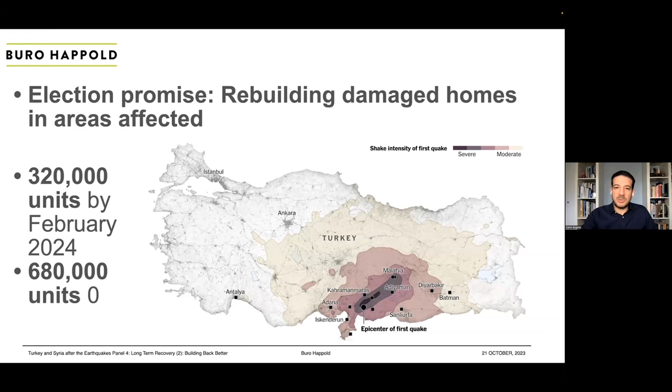So where are we now? Well, we have obviously the damage, and the government on the back of that during the election campaign back in May announced that it will build 320,000 units by the end of one year, so by February 2024, and also will build 680,000 by February 2025. And these are incredible numbers to be built in one year.

The former Minister for Environment, Urbanization, and Climate Change, Murat Kurum, went on CNN Türk back in May and said we already have 132,000 units under construction. However, as of last August, an estimate by Reuters showed only 40,000 were nearly completed, and it doesn't look like we're going to get the full construction anyways.

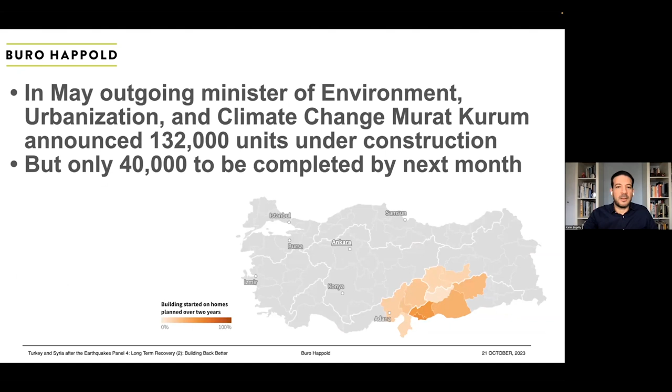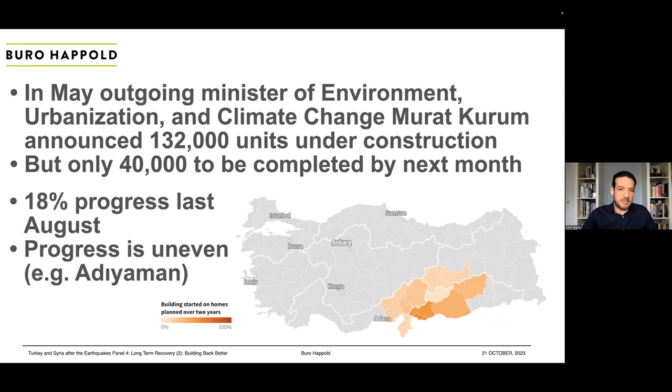On average, we have about 18% progress since February to date, and the progress tends to be quite uneven. Places like Adıyaman have much lower progress in terms of reconstruction. It really varies. I'm not going to go into why this is the case, but it's something perhaps you can find out for yourselves.

The way the reconstruction is structured is that all the reconstruction is handled by TOKİ, which is the Housing Development Administration, a national agency. And TOKİ normally manages about a quarter of this amount of construction every year, so for them this is a major undertaking.

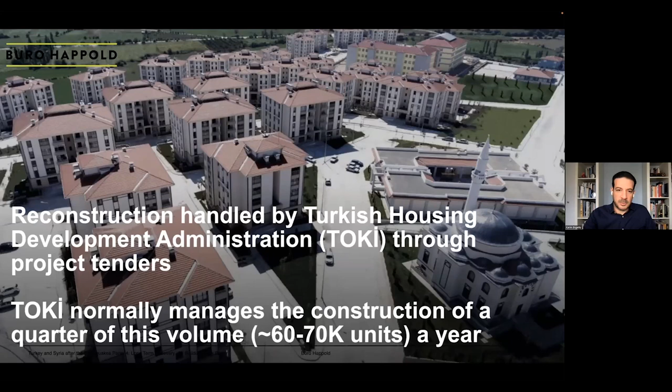What they do is they send out tenders, and private contractors will take on those units of construction, and perhaps some of the public realm that goes with that to build those. And of course, all of that is covered by the ministry itself, the Ministry of Environment, Urbanization, and Climate Change, which takes on an overseeing role.

What we have seen so far is an absolute laser focus on speed, which is very understandable given the fact that many people do find themselves living in container homes. But this pride in how fast we're going to build this so rapidly is a little bit surprising given the nature of the undertaking.

The way regeneration works tends to be quite complicated. It's becoming increasingly complicated given the environmental and social factors that have gone into the redevelopment process globally around the world, and everything tends to take more time every year or every decade rather than less time. And also, given the scale of this, the government's own estimates is that this is going to cost 105 billion, definitely more than 100 billion, which is roughly 10% of national GDP.

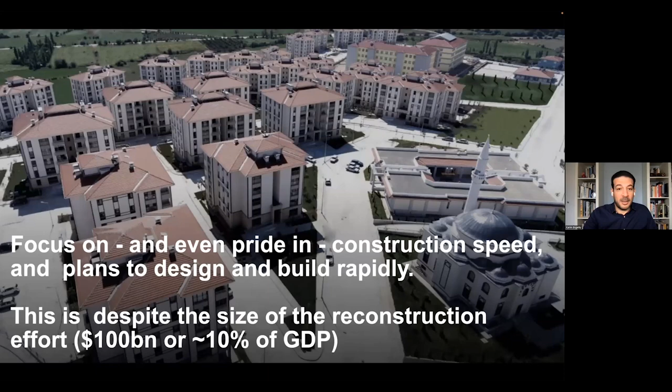This is no small undertaking, and doing it quickly has inherent risks. So only focusing on earthquake reconstruction, on the fact that we will only build this so it doesn't fall down again with the next earthquake, has, in my view, risks that I want to highlight during this presentation.

One risk is that you build something that becomes less livable—too hot because you didn't consider future climate due to climate change, for example, or it floods. We've seen flooding following the earthquake for unrelated reasons. If this area is constructed without adequately considering stormwater management, it becomes unlivable. If it becomes too polluted because you didn't consider public transportation or walkability, and depended too much on cars, that's also a risk. This unlivability means you end up with assets that you've spent significant money on becoming stranded assets. That's a risk that needs to be highlighted.

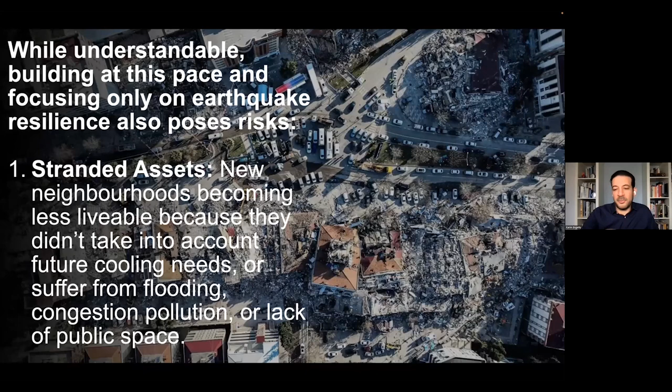The other thing is the missed opportunity, not only a risk but also the missed opportunity. There's a clear benefit in urban sustainability, urban resilience, and integrating those into large-scale reconstruction. You don't want to miss out on that opportunity. If you're going to spend $100 billion on reconstruction, you should do that in the best way possible to ensure its long-term sustainability, resilience, and its provision of livability and inclusivity for those who live there.

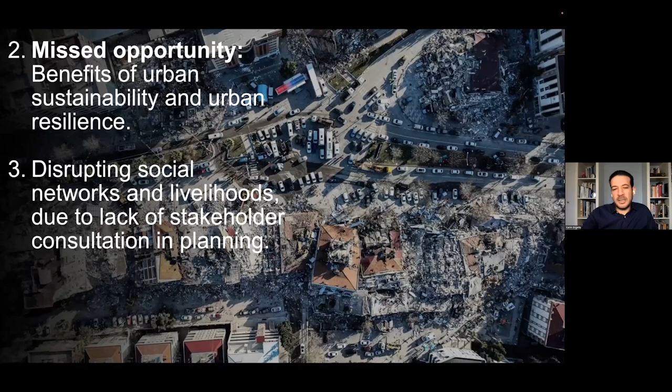In addition, the additional risk is that if you do this too quickly, you don't consult with the local population. You don't talk to people—where are their jobs, where do they live, how can we do this without disrupting their lives? Of course their lives have been disrupted, but they can be put back together with some degree of normalcy. If you build without this stakeholder consultation, you could end up disrupting some of those social networks, and also the livelihoods of people and the way they work.

It will definitely get less rainfall, potentially up to 40% less, which will affect agriculture. But the nature of that rainfall is that it will be longer droughts—it won't rain for longer, and then when it does rain, it will rain intensely. So longer droughts, but also more intense flooding. Overall, the amount of water will be less than it used to be, perhaps significantly less, and it will come in a less useful way. Because of the coastal nature of some areas within the earthquake-affected region, it could also experience sea level rise in some locations, which can have an impact. But I won't go into great detail since most of those cities aren't coastal anyway.

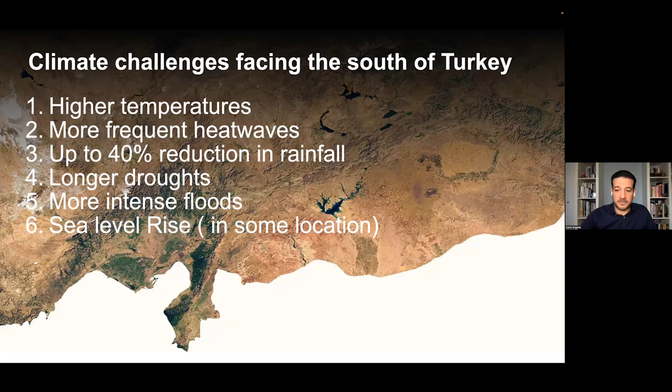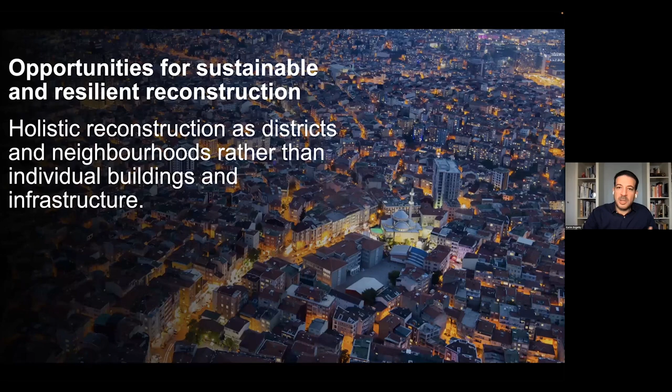So what are the opportunities that reconstruction should consider—opportunities that the models we've seen from Turkey don't necessarily aspire towards? The opportunities, in my view, are primarily treating this redevelopment process in a holistic way. These aren't units—we're not building a number of units, we're building neighborhoods, we're building districts. Those districts come with interlinked and interconnected urban systems that are best designed together, to explore synergies and opportunities of making the most of those urban systems, and of sustainability and resilience. This holistic approach, rather than an individual asset approach, is one of the most critical opportunities that needs to be exploited.

The damage being mostly in the historic cores, although not exclusively—the historic cores of those cities also, because these are the city centers, also has impacts on the whole city.

If you redevelop the city center, it regenerates the whole city, or it doesn't regenerate the whole city. It could hollow out the whole city. So it really is critical in how it can amplify the effect.

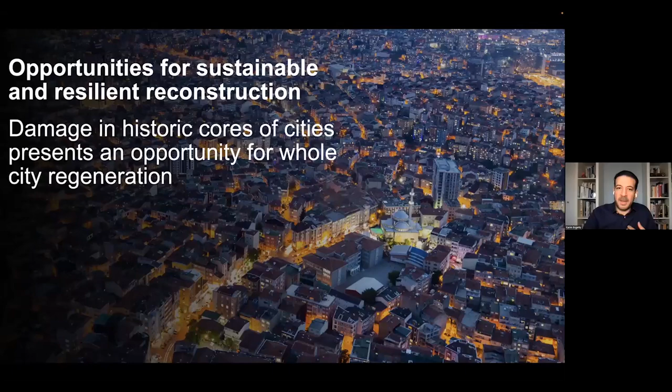If you develop a city center, it raises questions as to what kind of city you want around it. Do you create a more centralized city? Do you create a city where the city center is smaller, weaker, and becomes more polycentric, or more like an urban village, as you see in some places around the world? Do you do a city center that's strong and dense, but also with other secondary hubs? Every one of those models has its advantages and its weaknesses.

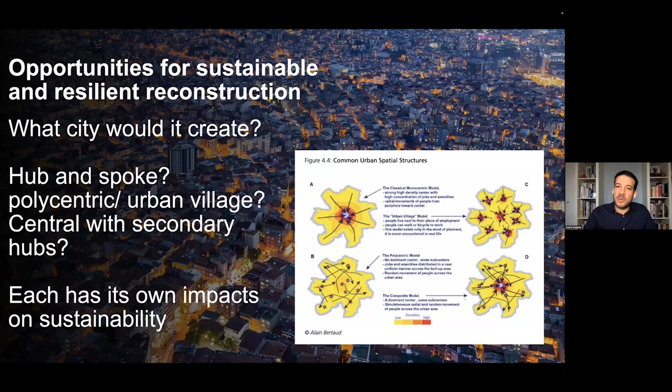As you approach a city center, you have to ask yourself what that means for the wider city. But regardless, we have these fundamental principles.

As you regenerate a city center after an earthquake, you have to ensure your land use is efficient. You have to densify—this goes without saying, it has to be dense enough. And this density has to be of mixed use nature. So mixed use planning gives you commercial, retail, offices, residential, plenty of it within the center district.

As you do that, the density and mixed uses within the city center will lend themselves to transit-oriented development, development driven around transportation, meaning you don't need cars as much. Many of those five provinces affected are highly dependent on cars, and there isn't really major infrastructure for public transportation. Perhaps Kahramanmaraş has some plans, but by and large, the desire to move away from private car use will lend itself to transit-oriented development, which has benefits all around, from air quality to energy efficiency and energy security, and improving health and well-being due to walkability and bikeability.

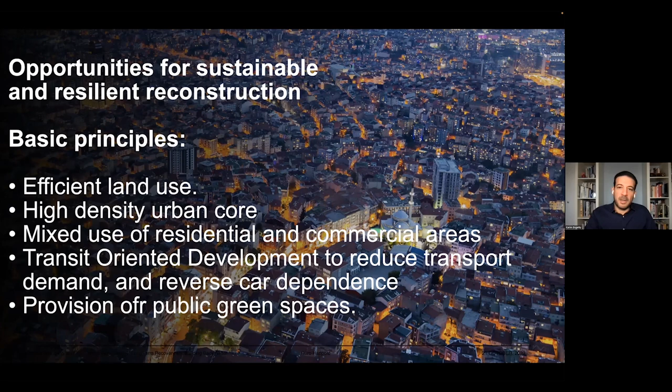And with that, you'll get more spaces dedicated for green areas, which will support some of those goals I mentioned, but also provide additional benefits, which I'll get to in a second.

The other opportunity that reconstructing in a way that considers sustainability and resilience provides is the ability to do integrated planning. It allows you to think of all the urban systems together as you approach it, not as units, but as a whole district or a whole neighborhood.

You're able to think not just of the urban form, the buildings, but also of energy networks, water networks, transportation and mobility networks, where materials are coming in and how they're leaving as solid waste, how stormwater is integrated within all of that, and food—do you get food production within the city or not? It allows you to think of ecosystem integration and how to make this more regenerative, benefiting from the ecosystem values and benefits it provides to a city.

It allows you to control or improve the microclimate for current climate or future climate change, and allows you to consider the integration of ICT systems, information and communication technology, and smart city technologies, as the case may be.

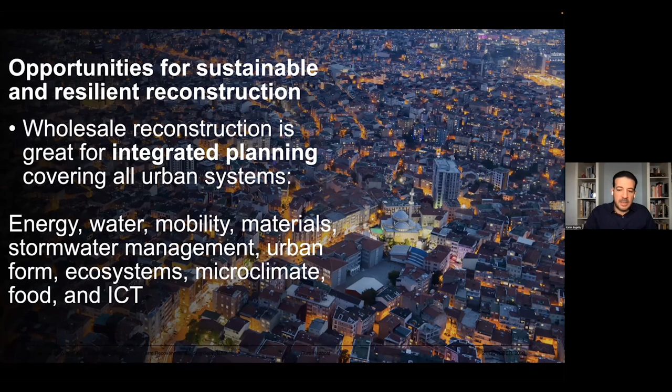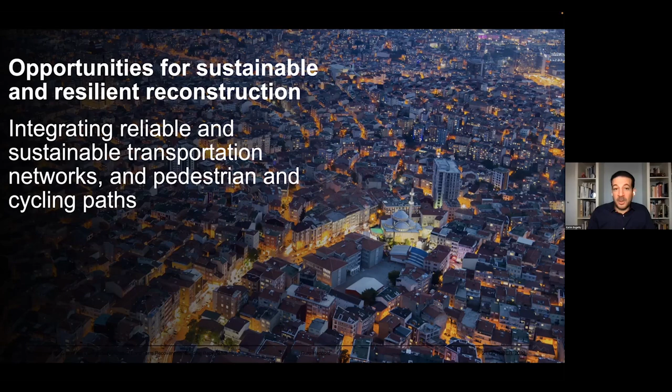But regardless of how you do it, integrating reliable and sustainable transportation is absolutely key, and ensuring walkability and bikeability are critical.

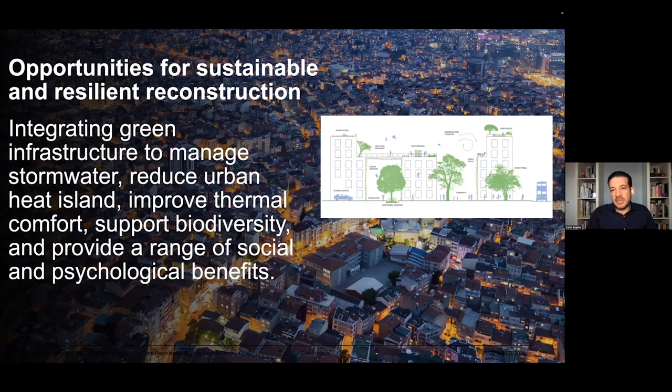Integrating green infrastructure, allowing not just open spaces but also trees and vegetation at different scales, allows you to manage heat—reducing urban heat islands, which increase temperatures in city cores, and improving thermal comfort, which is useful given climate change risks. It also allows you to bring biodiversity into the city, which has additional benefits in terms of ecosystem functions, as well as social and psychological benefits that green spaces and green infrastructure can produce.

Certainly, integrating water efficiency measures.

For example, if you have wastewater in the city, as you rebuild at large scale, you'll be able to integrate a network that captures the wastewater, treats it, and reuses it within the city, say for irrigation. Not having the opportunity to rebuild is actually quite difficult. Integrating such a system in an existing fabric, in a city that hasn't been damaged, or is an existing city, is often prohibitively expensive. But having this opportunity to build in this energy and water efficiency into the system is a great opportunity and shouldn't be wasted, because otherwise you won't achieve it later on.

Likewise, if you're building dense neighborhoods, you could build in a district heating or district cooling system, which is much more efficient in terms of energy efficiency. It requires a central plant and lots of pipe work connecting to the individual buildings you're about to build. Not considering that means reverting to individual air conditioning units or heating systems, which are less efficient.

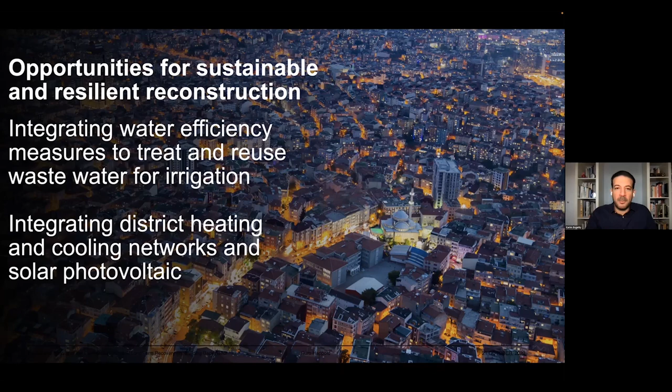So all of these opportunities only happen if you consider things holistically and take the benefit of this once in a lifetime opportunity - in this case, once in a few centuries opportunity. I say this while considering that tens of thousands of people have died, but it is an opportunity for future generations. So in order to build this to last, and not let down future generations, considering those things would be critical.

And of course, on buildings, we can't ignore building buildings that are ready for future climate. Not only in terms of the buildings themselves and passive design measures that can be integrated into them, and how you cool and ventilate them in the most energy efficient way, but also in terms of large planning of entire neighborhoods that facilitates that.

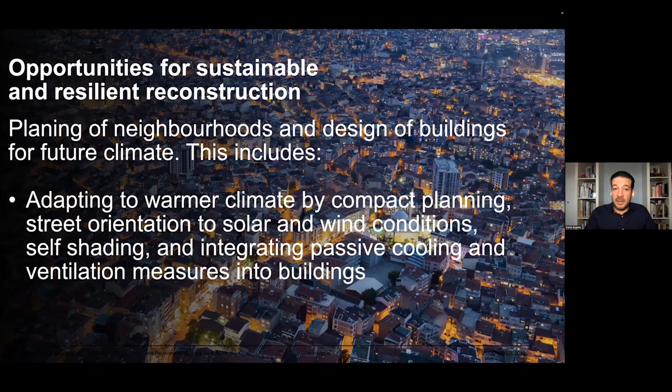How do you lay out your roads? How do you align to solar geometry and the way the sun moves around your building? How do you align to air movement and allow air movement at the right level within your neighborhoods? All of these are critical in reducing heat stress, which would be considered a measure for adapting to climate change.

But also in terms of mitigating climate change in the first place, or taking a carbon lens into account, reducing energy demand is absolutely key, and it's also part of Turkish climate policy, which aims for decarbonization entirely by 2053.

Improving energy efficiency in buildings is critical. In Turkey, buildings represent perhaps a higher share of energy use than in other countries. At the moment, it's around 33% of all energy use happening in buildings, and energy efficiency standards are not very high across the board. Even the target set for improving energy efficiency only aimed for EPC Class C, so aspiring to do a little better than this would certainly go a long way.

And if it does, perhaps it could become an opportunity for a test bed for the larger scale transformation of Turkish building stock. At the moment, the Kentsel Dönüşüm program has an aspiration of rebuilding 7.5 million dwellings by 2030. I don't personally think that would happen, but the program is still there, and the scale of reconstruction required for earthquake and other reasons is highly aspirational.

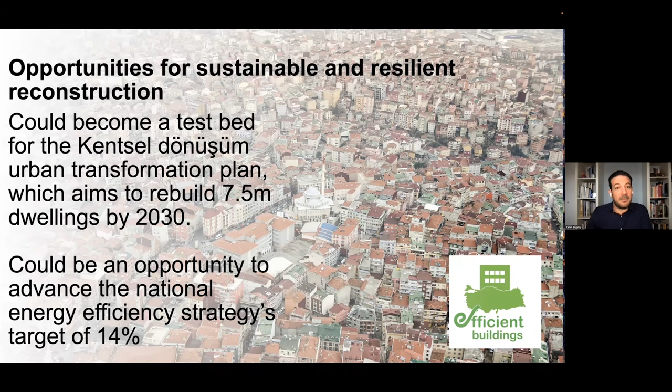It's an opportunity to not build back better, but build better in the first place. And if the success of reconstruction happens in the southeast of Turkey and can be replicated at a larger scale, I think that would be an opportunity not to be missed.

Another opportunity that, in my view, could help is Turkey leveraging the international support and sympathy it has gained following the earthquake. It has received billions from the EU and the World Bank, and perhaps engaging with some of those lenders, donors, and partners across the world who are aligned on some of the climate policy and sustainability goals. Leveraging these connections could help ensure that redevelopment becomes more sustainable, more resilient, and more inclusive.

And it won't only take the form of financial support, but could also take the form of technical support, as the case may be. And I will stop here and thank you all very much.